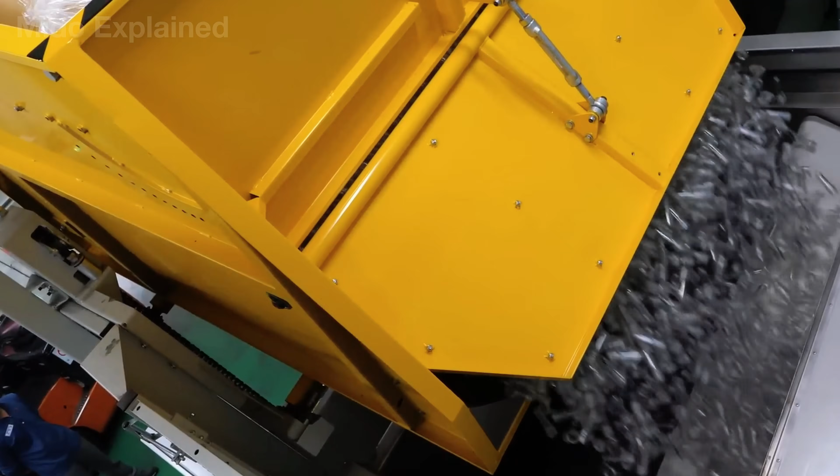Over 400 million tons of plastic are produced each year, and much of it is suffocating the planet. Plastic has become the biggest symbol of global pollution. But there's a paradox. If plastic is so bad, why is it considered humanity's greatest invention?

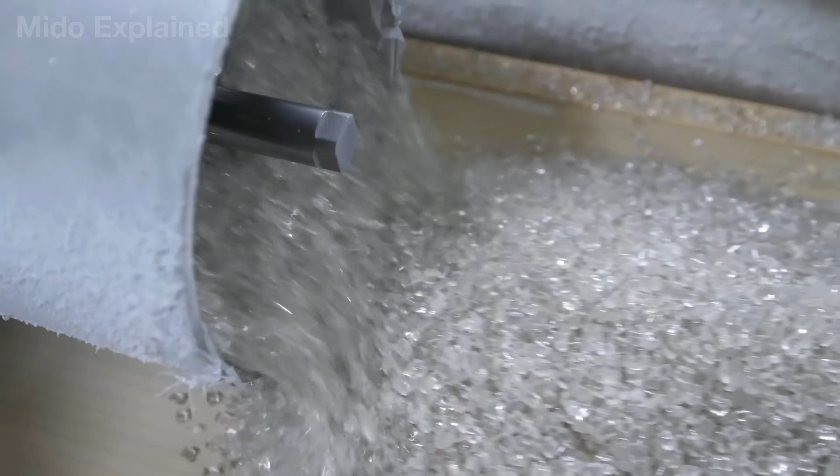Why does almost everything around you contain plastic? And how did a plastic waste product from petroleum become the framework supporting the modern world? The truth behind the plastic age will be revealed in today's video.

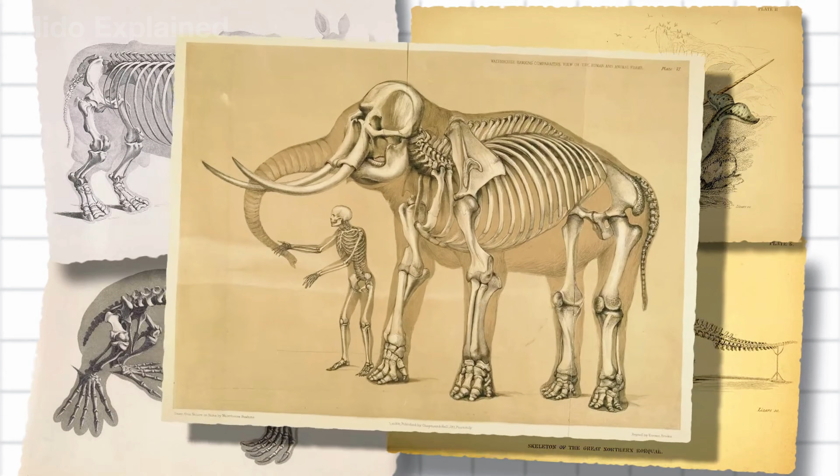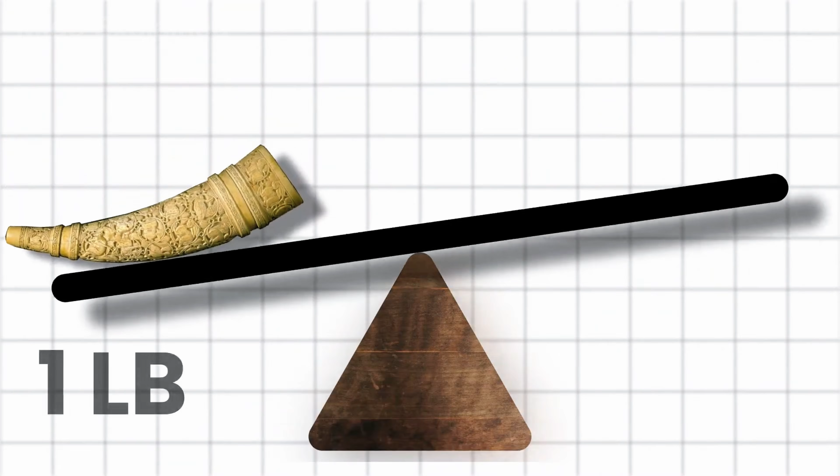Did you know that the invention of plastic is related to elephants? In the mid-19th century, demand for ivory products surged, especially for high-end billiard balls. Thousands of elephants were hunted each year to meet this demand, making ivory increasingly scarce and expensive.

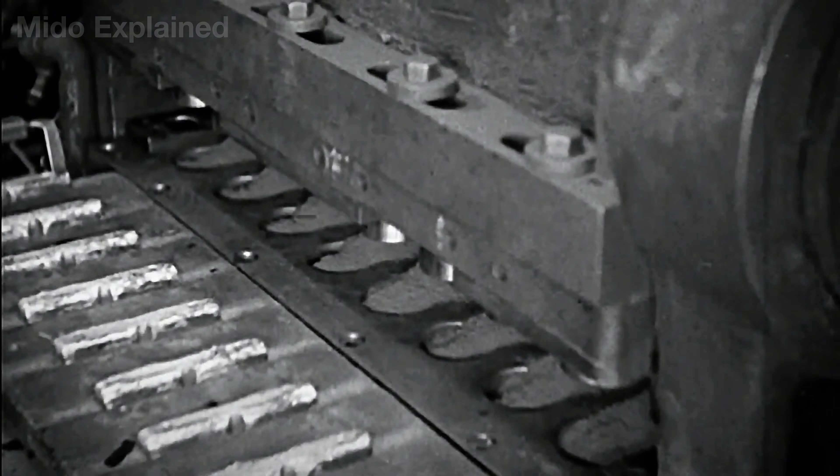In response, an American billiard company offered a reward to anyone who could find a substitute. In 1869, inventor John Wesley Hyatt created celluloid, the world's first commercially available plastic. Initially, celluloid was used to replace ivory in many products such as billiard balls, combs, and jewelry. Later, it became the foundation of the nascent film industry.

However, celluloid still had many limitations. The real turning point came in 1907 when Leo Baekeland invented Bakelite, the first completely synthetic plastic in history. With its electrical insulation, heat resistance, and low-cost mass production capabilities, Bakelite quickly ushered in the modern era of plastics. Since then, this material has appeared everywhere and gradually become an indispensable part of today's world.

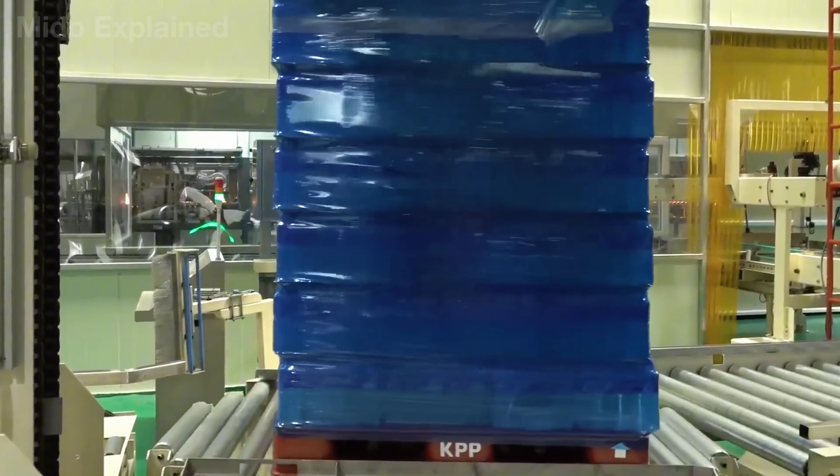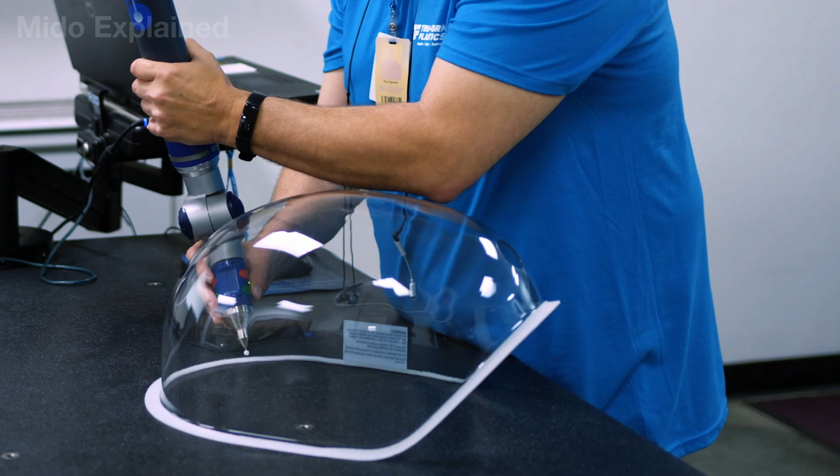However, the more one learns about plastic, the more one realizes it's not simply a material used for packaging or everyday items. For over a century, plastic has contributed to changing the way people live, work, and care for their health. From disposable syringes, IV bags, and blood bags to many modern medical devices, plastic has made treatment safer, more effective, and more accessible for billions of people worldwide.

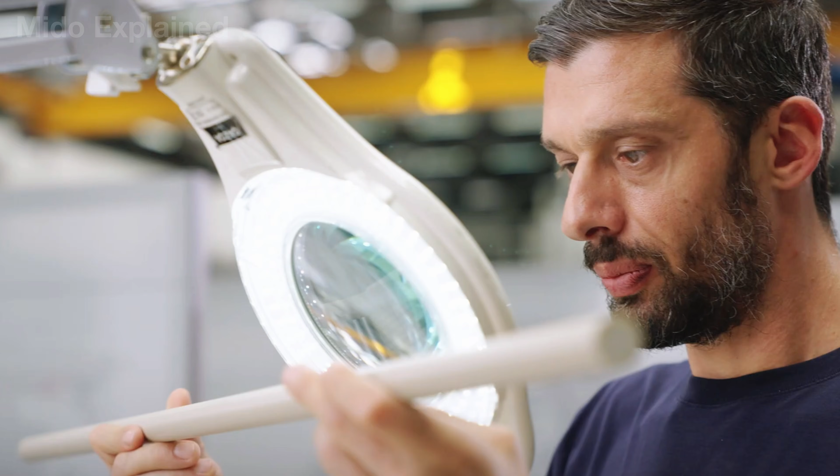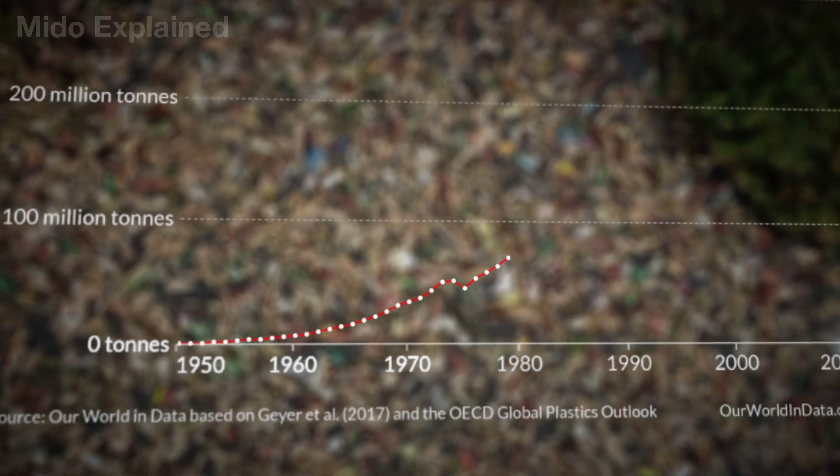Many experts believe that medical products made from plastic have contributed significantly to increasing the average human lifespan over the past century. Few people know that before plastic appeared, many familiar products were made from ivory, turtle shells, animal horns, or precious woods. When artificial materials emerged, they significantly reduced the need to exploit these natural resources. Therefore, in its early years, plastic was considered a promising solution to many problems of modern society.

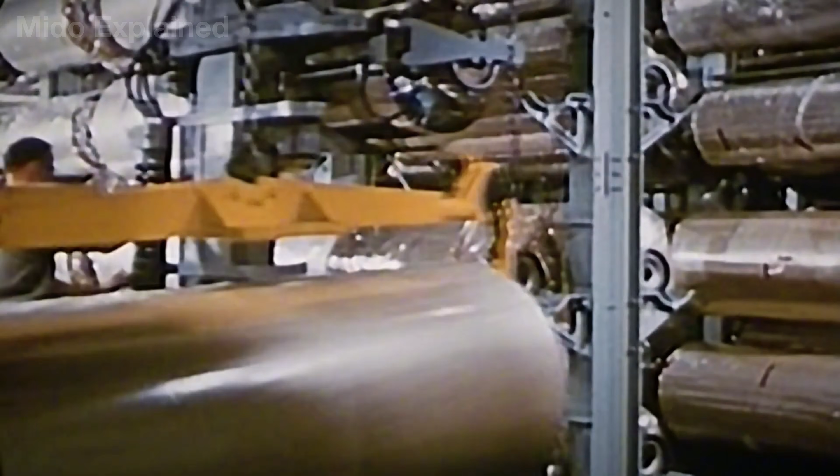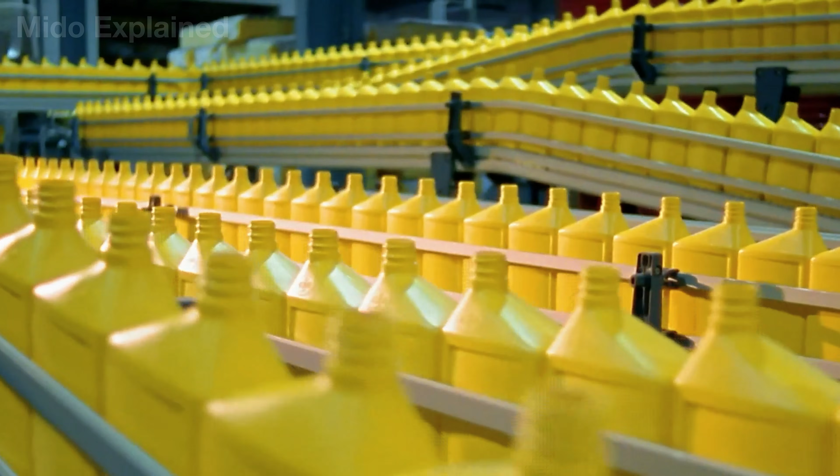With its lightweight, durable, easily moldable, and electrically insulating properties, and its ability to be mass-produced at low cost, plastic quickly became ubiquitous. This is also why many industrial historians consider plastic to be the most important material of the 20th century, comparable to the role of steel in the 19th century.

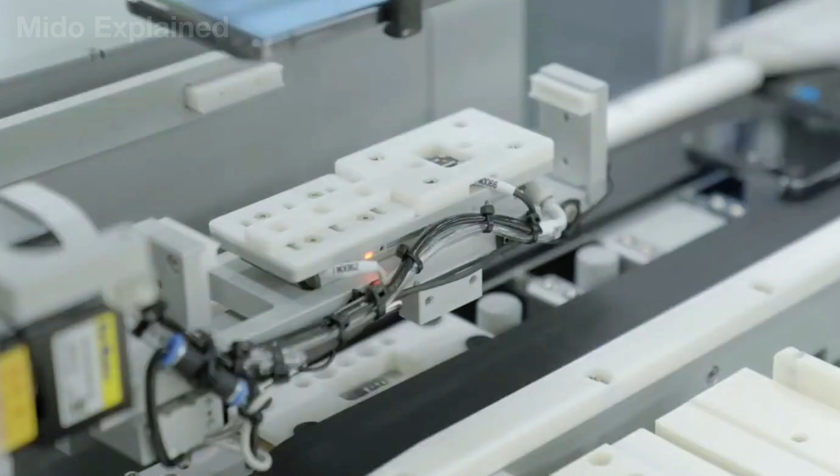Perhaps it is precisely because of these advantages that plastic has become an almost invisible part of modern life today. Look around you. The phone in your hand contains dozens of different plastic components, from the insulation to the internal protective parts. If all of them were replaced with metal or glass, the device would be much heavier, more expensive, and much harder to use.

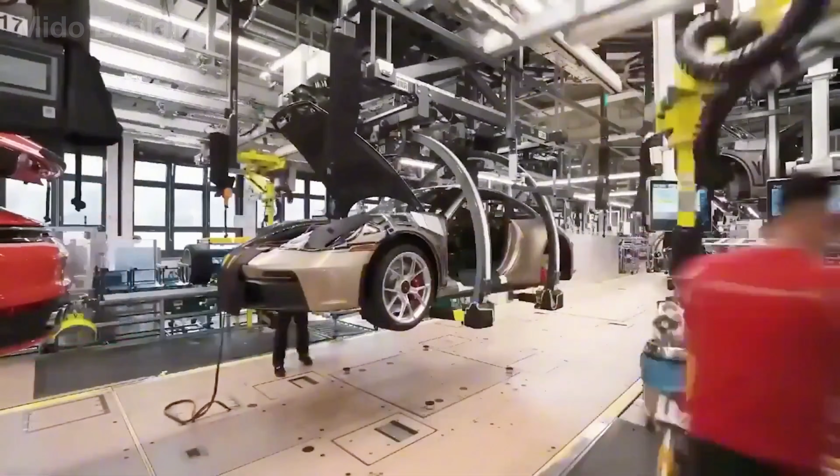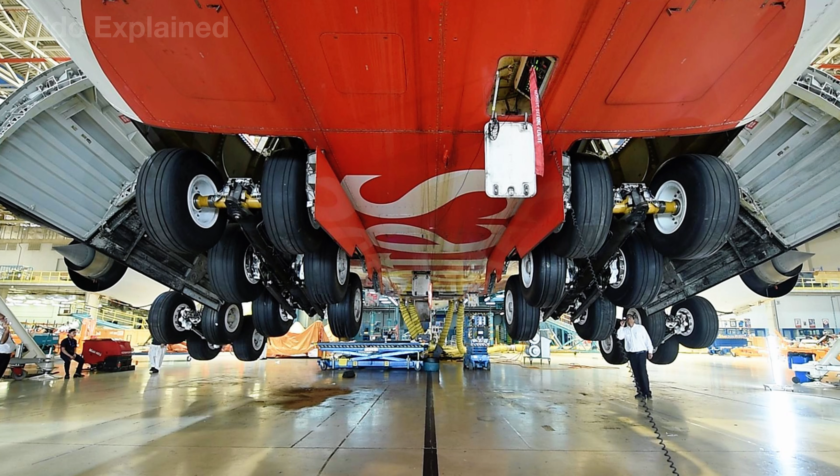The presence of plastic extends far beyond small everyday items. A modern car typically contains between 200 and 400 pounds of plastic in the dashboard, bumpers, wiring systems, and hundreds of other parts. In the aviation industry, polymer and composite materials derived from plastic account for nearly half the weight of many modern aircraft. Reducing weight allows aircraft to consume less fuel and fly further with the same amount of fuel. Even the clothes you wear may contain plastic.

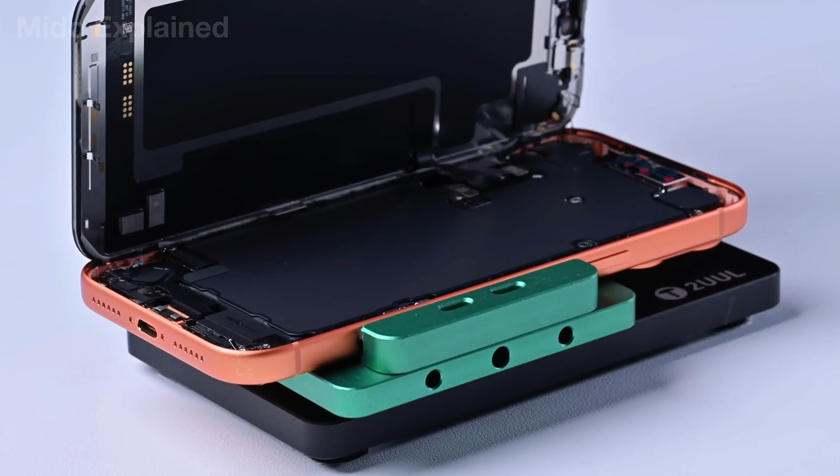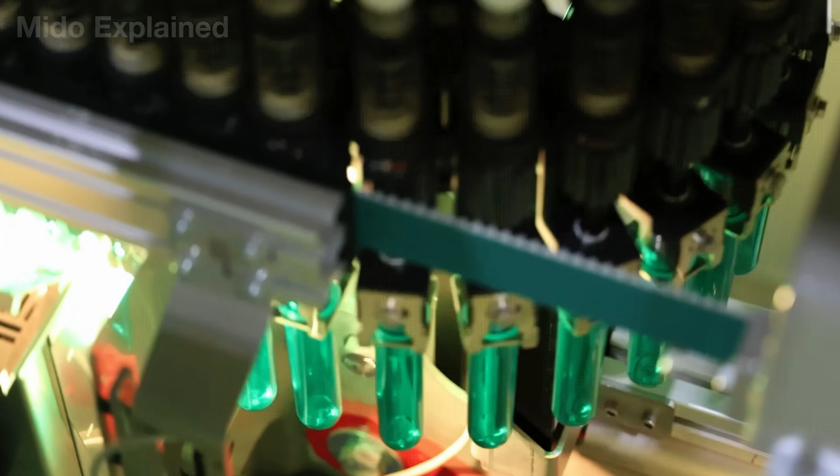Polyester, the world's most popular textile fiber today, is actually a form of plastic spun into extremely fine fibers. From cars, airplanes, and smartphones to clothing, household goods, and electrical systems, plastic is ubiquitous, and this is no accident. Its popularity stems from the fact that few other materials can simultaneously be lightweight, durable, corrosion-resistant, easily molded, and inexpensive enough to produce billions of products annually.

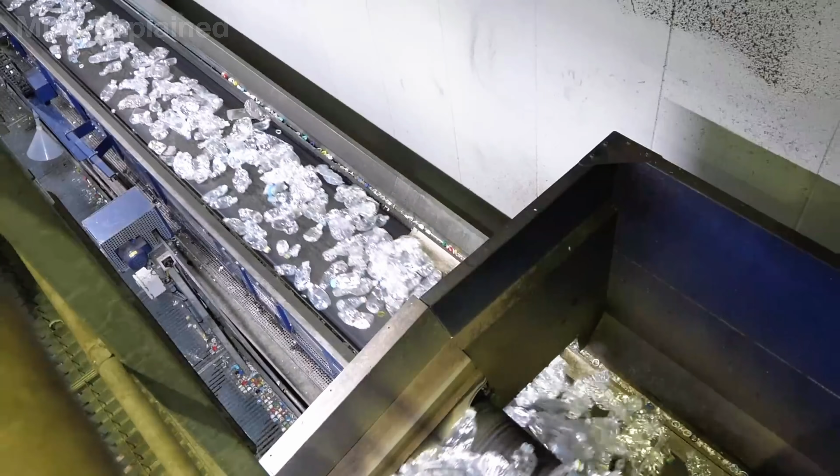However, the very properties that once made plastic an ideal material are now creating one of the biggest environmental challenges of our time. Plastic is lightweight, durable, and so difficult to decompose that a typical plastic bottle can take about 450 years to break down in the environment. According to many estimates, only about 9% of global plastic waste is successfully recycled. Nearly half ends up in landfills, while the rest is burned or leaks into the environment.

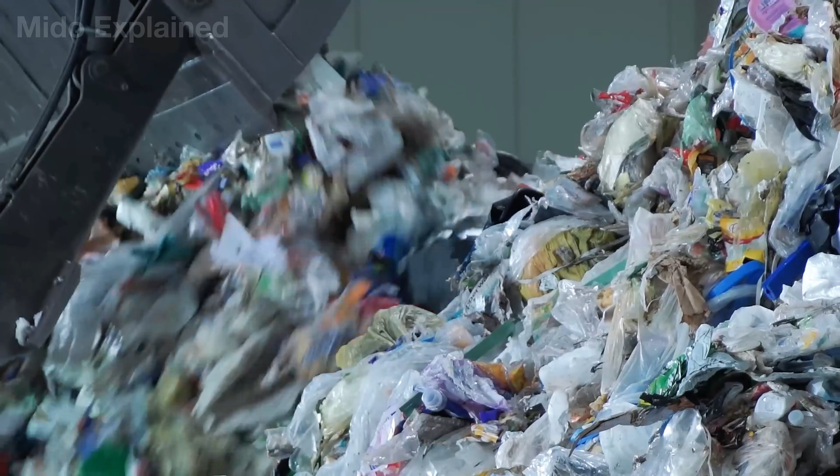Under the influence of sunlight, ocean waves, and weather, large pieces of plastic gradually break down into tiny microplastic particles. These have been found from the deepest ocean floors to the highest mountain peaks, even appearing in drinking water, food, and the human body. So how is a material that could change modern civilization actually created? Let's find out now.

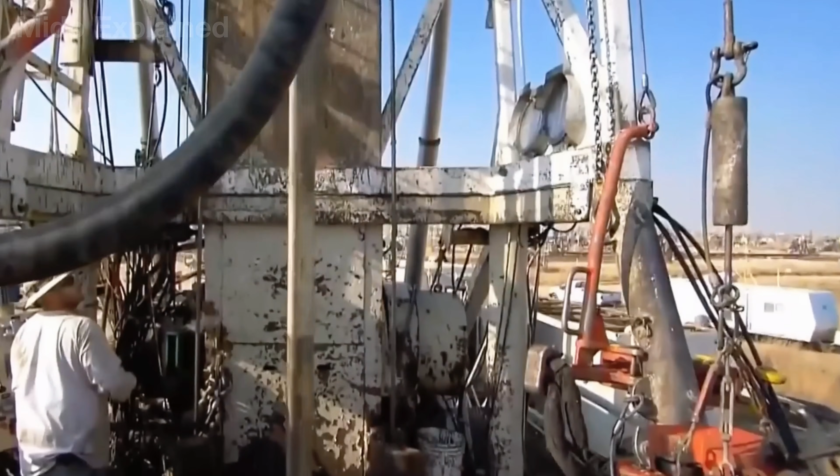The origins of plastic begin with petroleum and natural gas. These are fossil fuels formed from the remains of ancient organisms buried underground for millions of years. To extract them, oil and gas companies use massive onshore and offshore drilling rigs, drilling deep into the oil and gas-bearing rock layers. Interestingly, only about 4% of global petroleum is used to produce plastic. However, from that relatively small amount of raw material, humans create billions of different products.

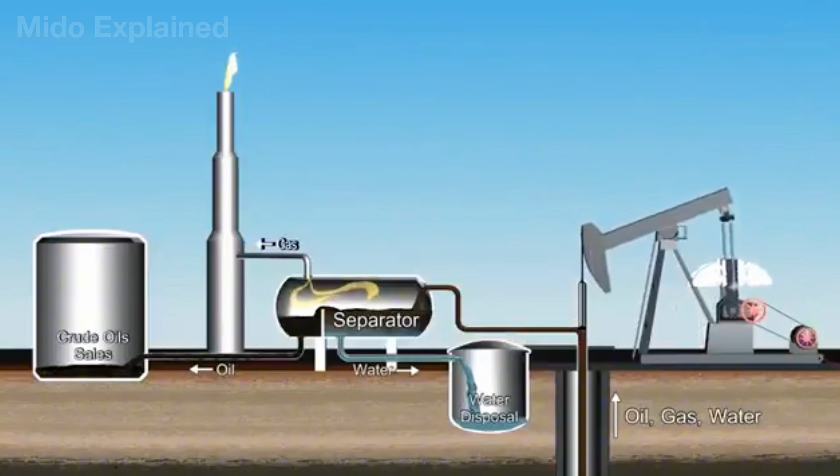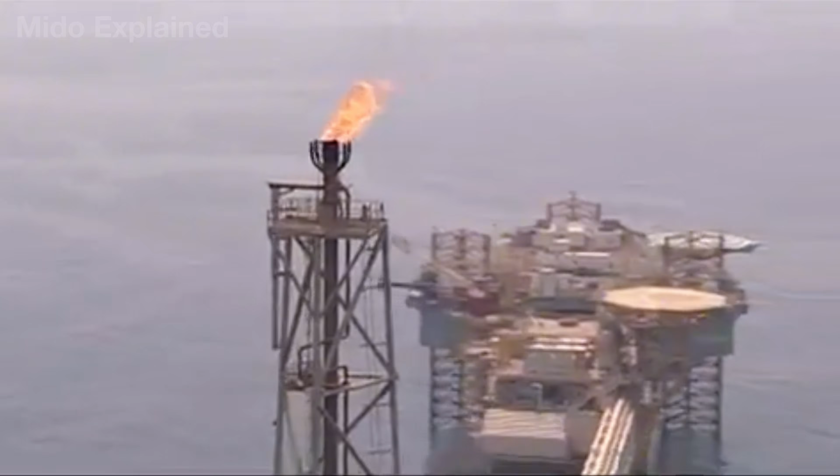After extraction, crude oil is transported to refineries where it is separated into various components. There, the oil is heated to approximately 660 degrees Fahrenheit in distillation towers up to about 200 feet high. As the temperature rises, the compounds in the oil separate based on their boiling points.

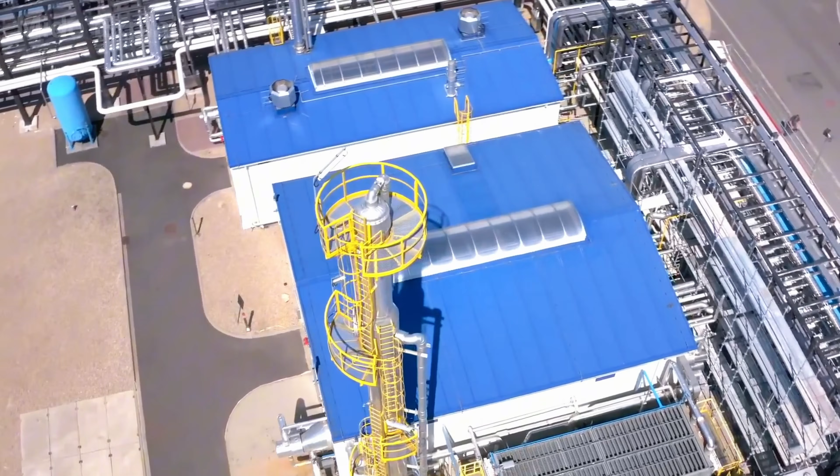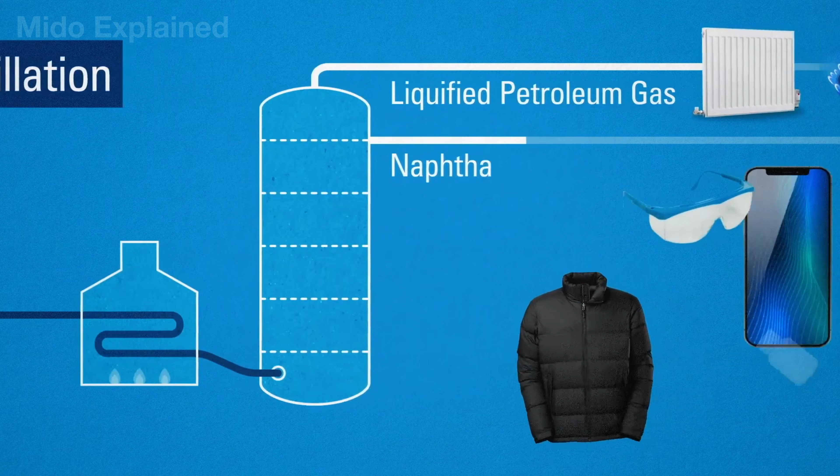One of the most important components for the plastics industry is naphtha. This is the primary raw material used to produce the basic molecules that make up most modern plastics. Besides naphtha, a barrel of crude oil can produce many other products such as gasoline, diesel, liquefied petroleum gas, and asphalt.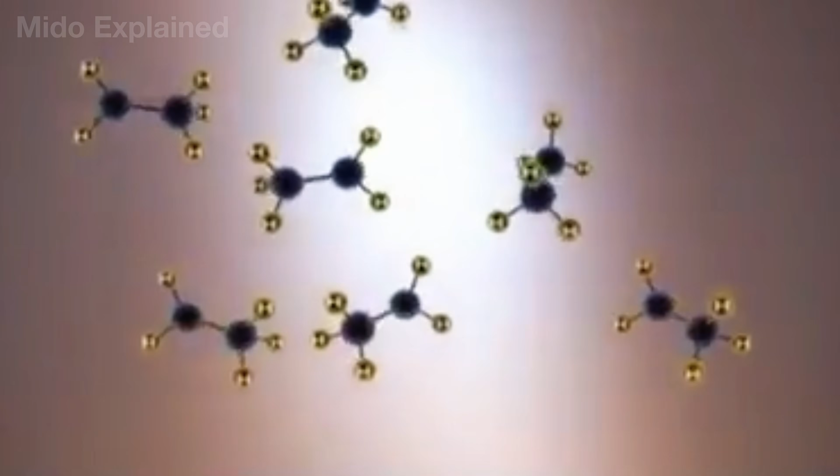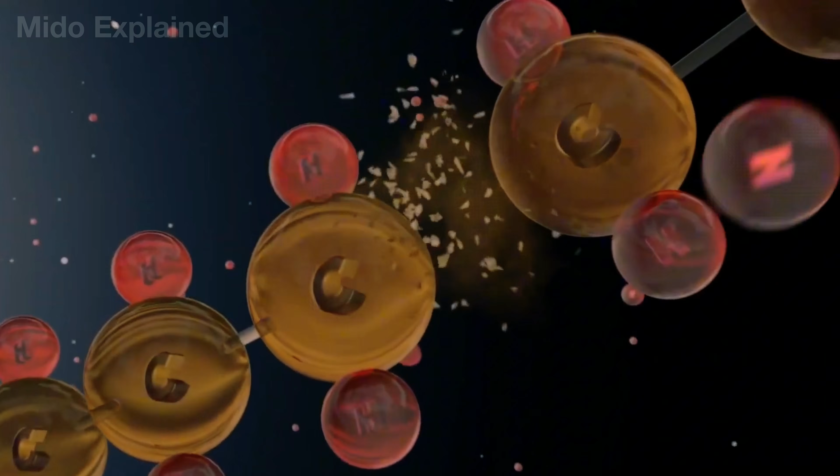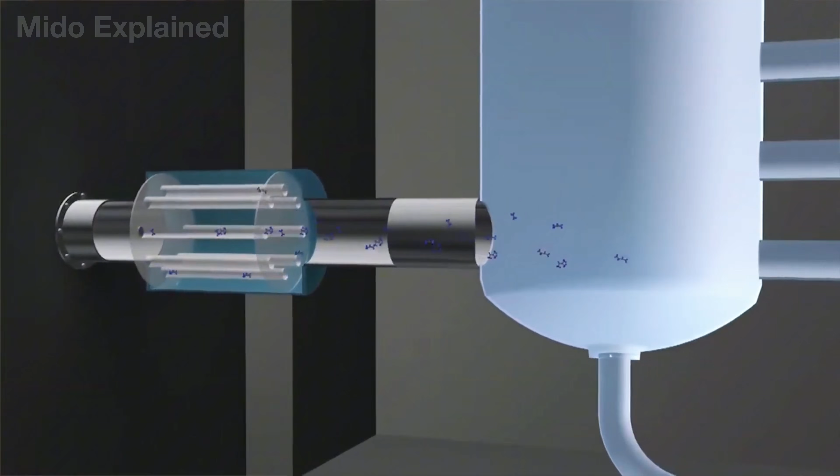After being extracted from crude oil, naphtha is transported to petrochemical plants for cracking. There, it is heated to approximately 1500 to 1600 degrees Fahrenheit, causing the large hydrocarbon molecules to break down into smaller ones. The result of this process is the formation of monomers such as ethylene and propylene. These are the basic raw materials for the production of many common plastics used worldwide today. Before use, the monomers are further purified and separated to achieve the required purity.

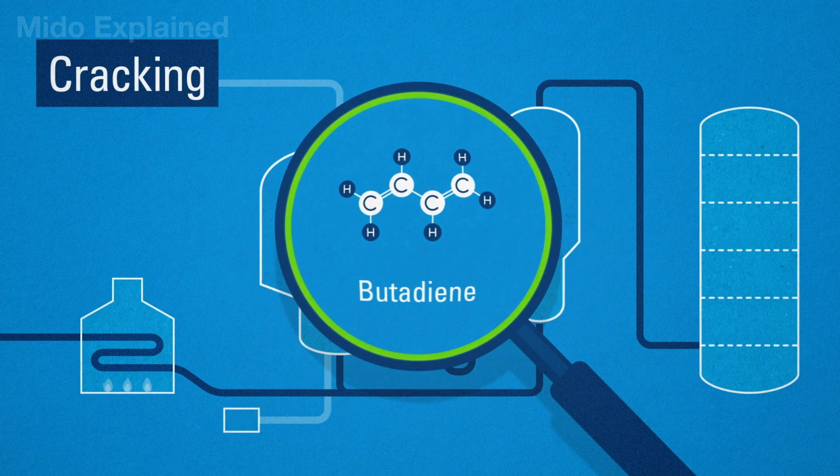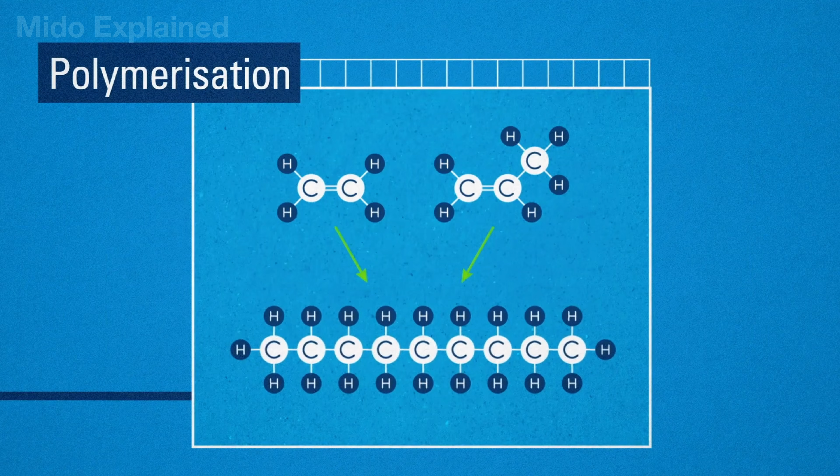After being refined, monomers such as ethylene and propylene are fed into reaction vessels to undergo polymerization. Under controlled temperature and pressure conditions, thousands of tiny molecules link together, forming long molecular chains called polymers. This is the basic component of most modern plastics.

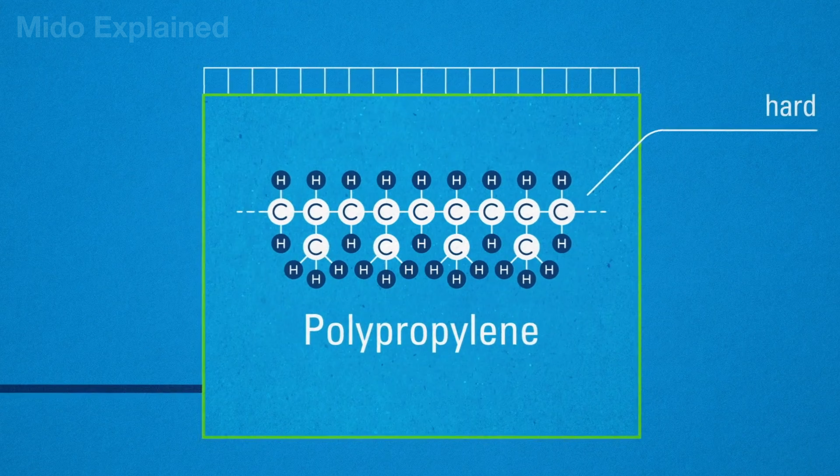Depending on the type of monomer used, factories can produce many different types of plastics. For example, PET is commonly used to make water bottles, polyethylene is used for bags and packaging, and polypropylene is found in bottle caps, food containers, and many household products.

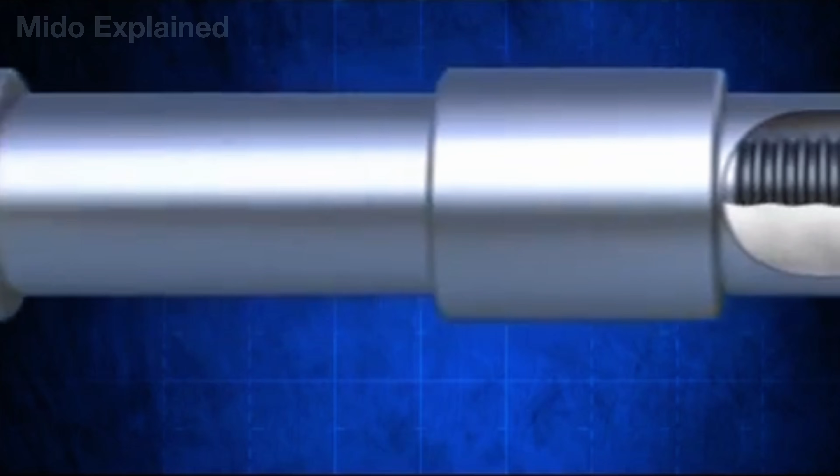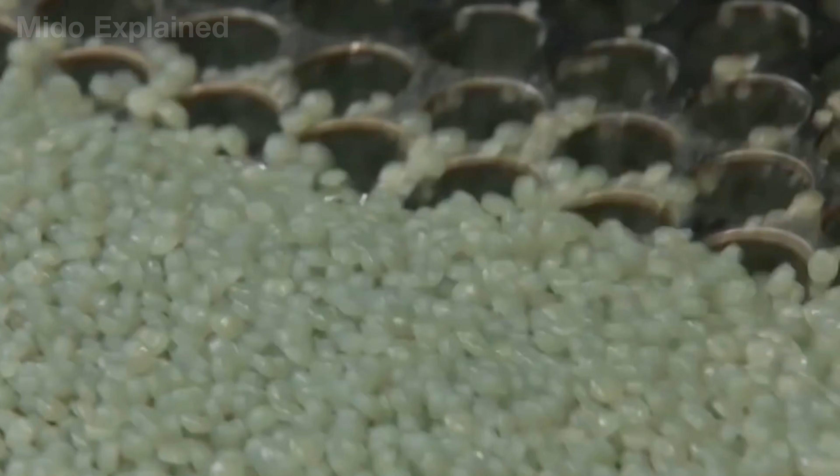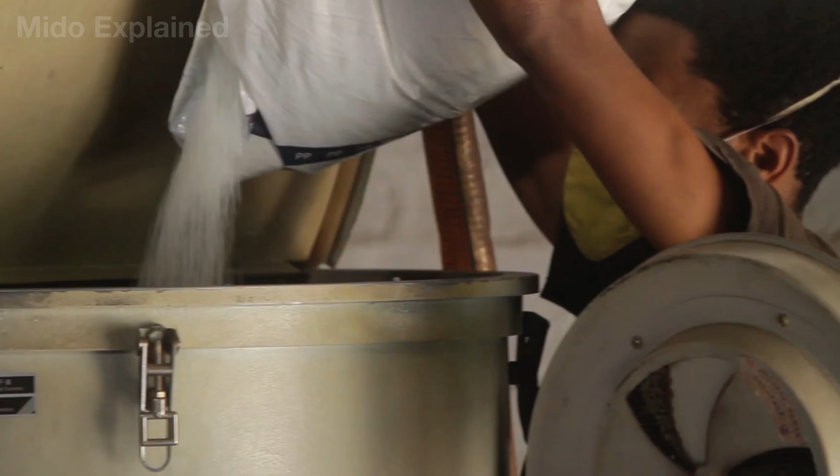After formation, the polymer is cooled and transformed into small plastic granules called nurdles. These are the raw materials for the plastics industry, typically only a few millimeters in size and easy to transport and store. During this stage, manufacturers can add additives to alter the properties of the plastic, such as increasing strength, heat resistance, UV resistance, or creating desired colors. The granules are then packaged and shipped to manufacturing plants around the world.

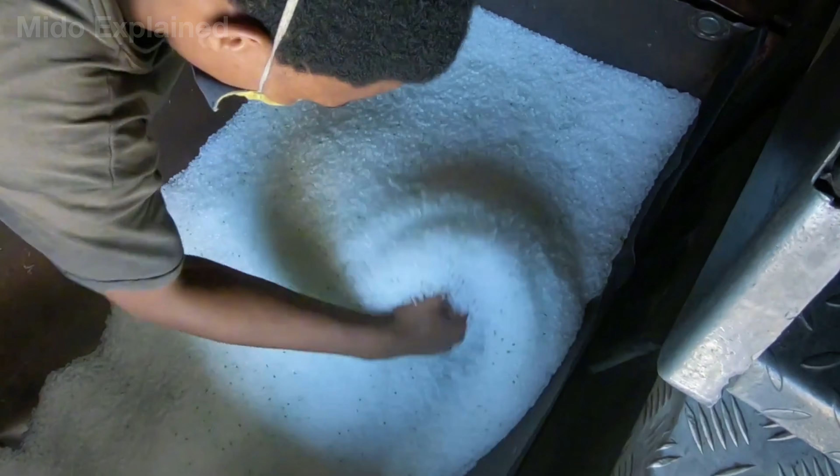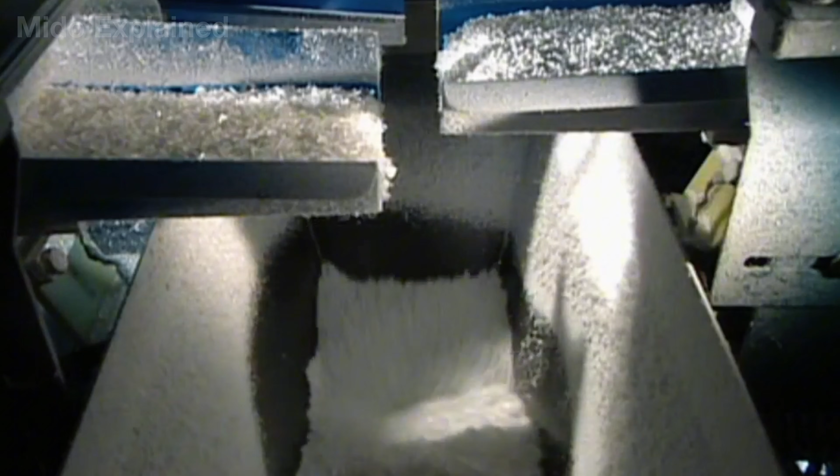From these plastic pellets, manufacturers begin creating bottle preforms, an intermediate step before forming complete plastic bottles. PET pellets are heated to approximately 480 degrees Fahrenheit and then pressed into molds to form preforms shaped like test tubes. The bottleneck and screw cap are already pre-made at this stage.

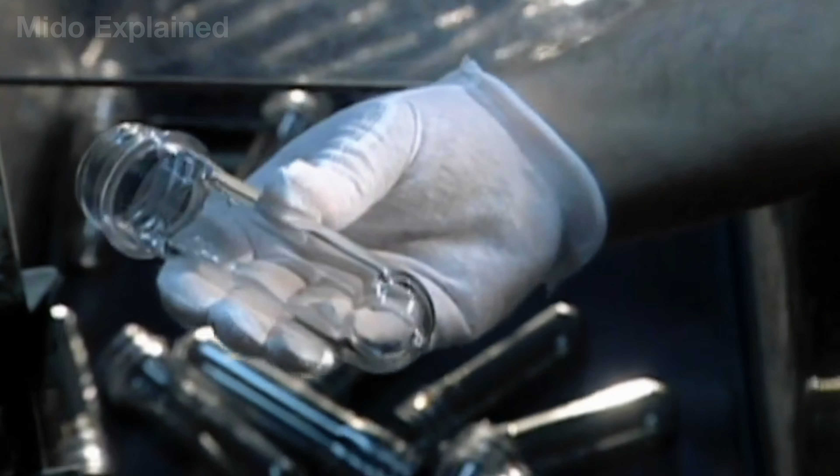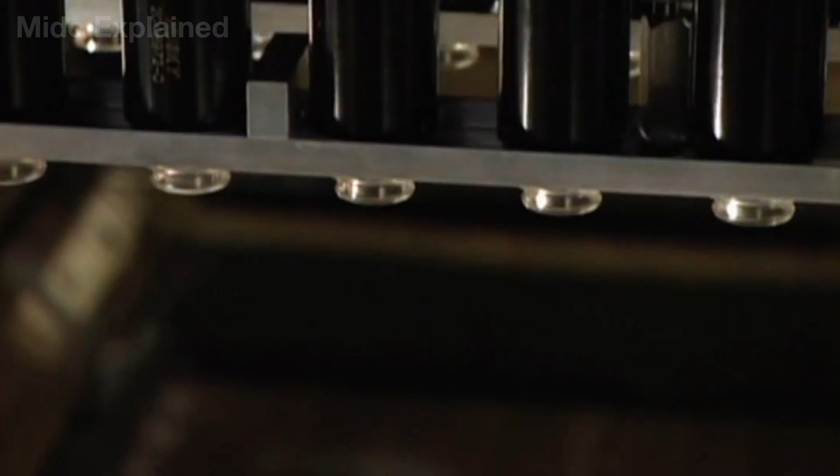Producing in preform form allows for precise control of the amount of plastic used for each bottle, while ensuring consistent size and durability. Because preforms are much more compact than finished bottles, they are also easier to transport and store. For this reason, many factories specialize in producing only PET preforms, which they then ship to beverage bottling facilities.

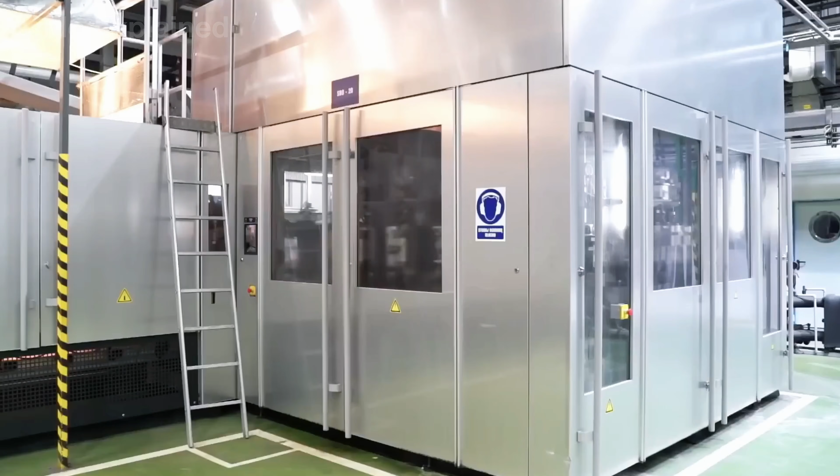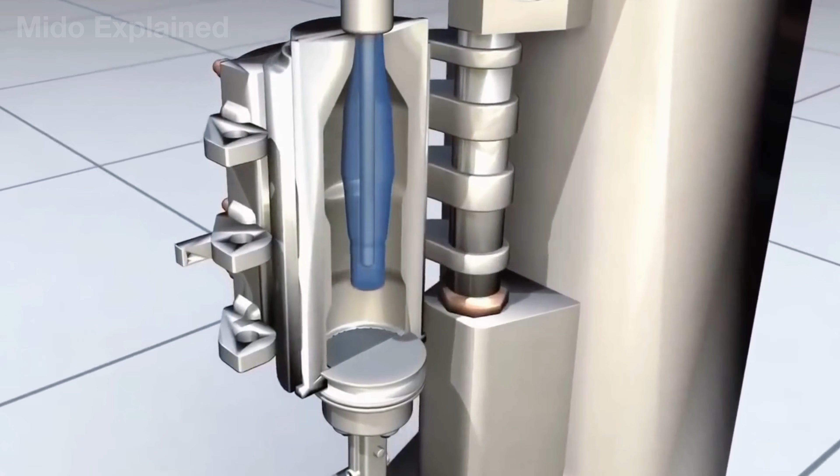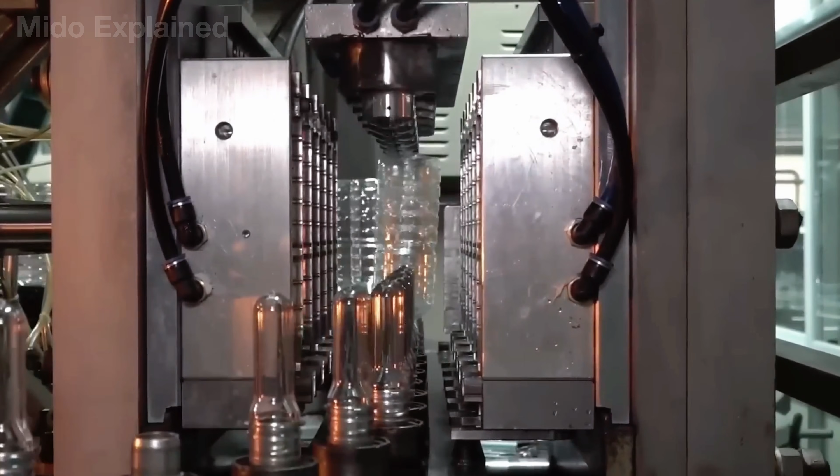After production, the PET preforms are reheated to prepare for the blow molding process. Once the plastic reaches the appropriate softening point, high-pressure compressed air is pumped inside, causing the preform to expand and press against the metal mold walls. In just seconds, a small preform, about 4 to 5 inches long, can be transformed into a complete water bottle many times its original height.

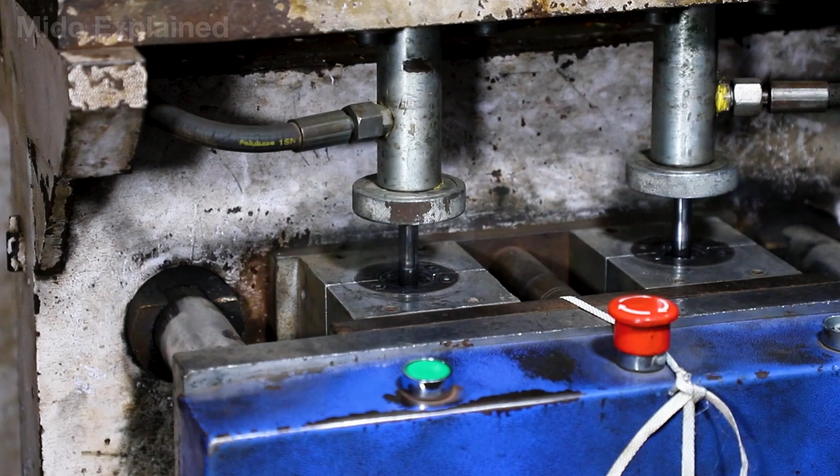This process is called blow molding and is the technology used to produce the majority of plastic bottles worldwide. Automated systems continuously monitor the size, wall thickness, and product quality to ensure each bottle meets the same standards. By changing the mold design, manufacturers can create a wide variety of bottles in terms of shape and capacity.

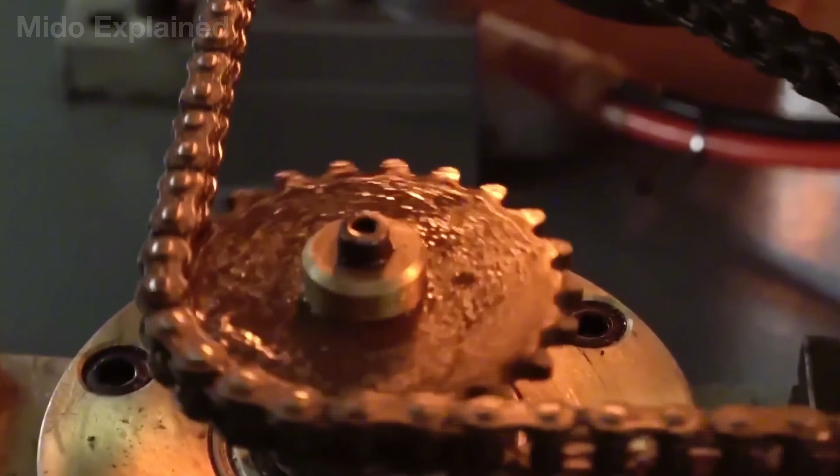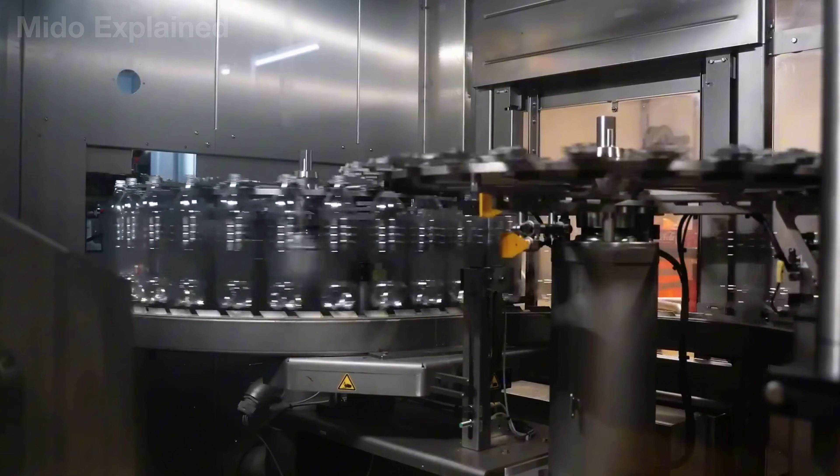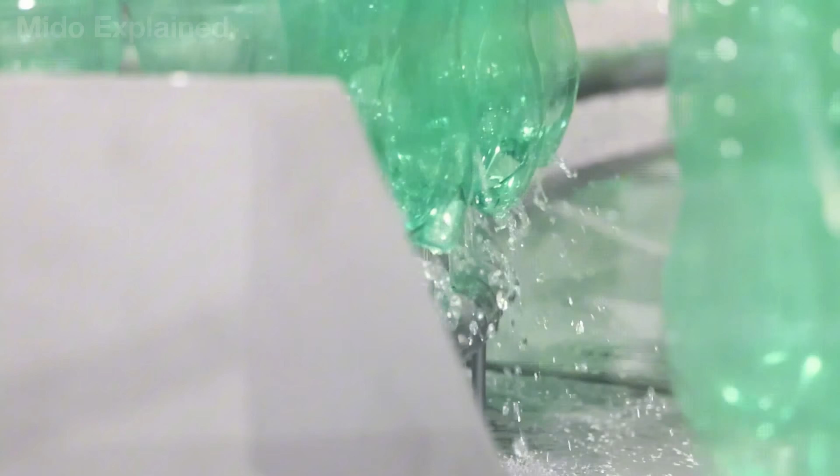After being blow molded, plastic bottles remain very hot and need to cool down quickly to maintain their structure. Factories use cold air or recirculating cooling systems to lower the bottle's temperature in just seconds. Once the temperature stabilizes, the plastic hardens and retains its final shape. This makes the bottle strong enough to withstand impacts, stacking, and long-distance transport without damage.

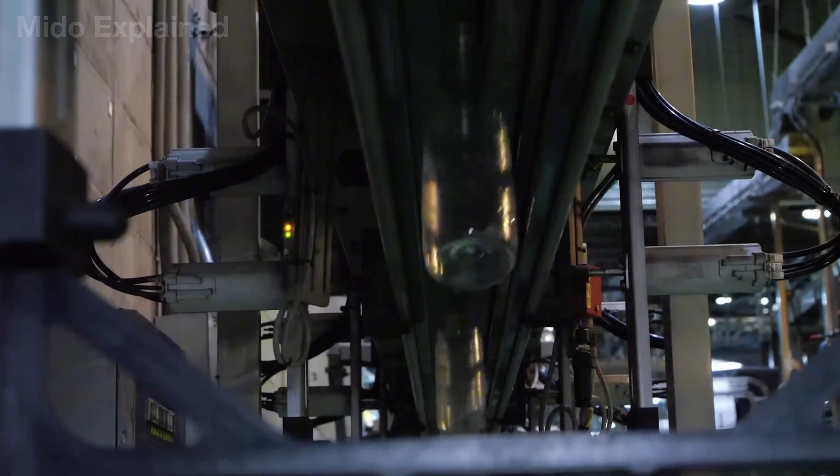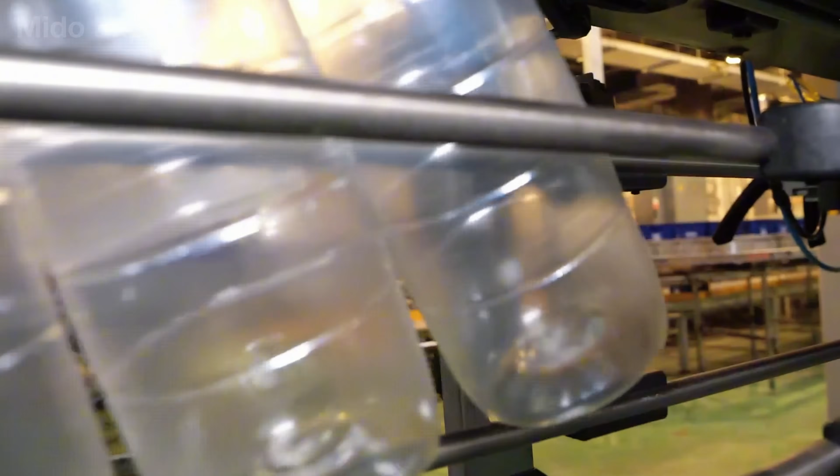After cooling, the plastic bottles undergo a quality control check. Products that are warped, cracked, or do not meet standard dimensions are rejected. In modern factories, automated camera and sensor systems can inspect thousands of bottles per minute to detect defects before they leave the production line.

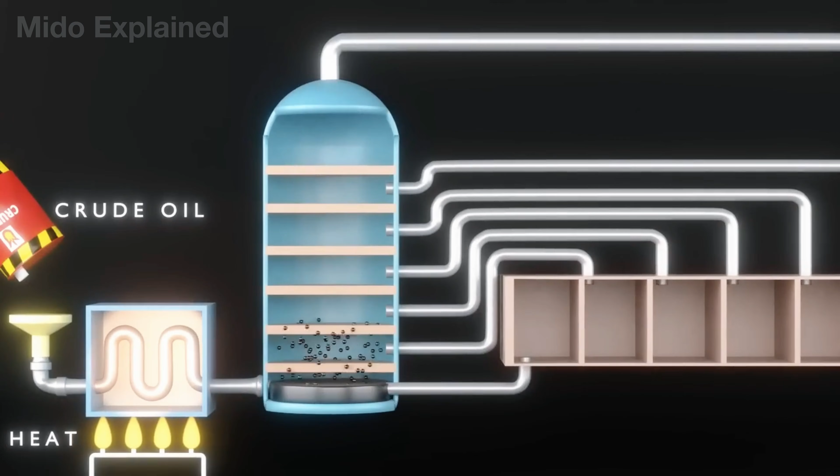From petroleum deep underground to the familiar plastic bottles in our daily lives, the journey of plastic is a combination of chemistry, engineering, and massive-scale production.